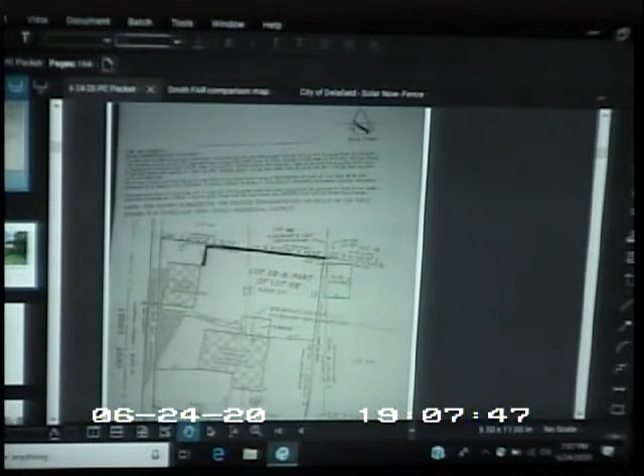When I saw your proposal, I liked the idea of keeping that buffer, and I think I'd like to keep that fence there as well. That way it won't allow my neighbor to use that 3 feet as easily, and I'd like to keep that space for that buffer.

But one thing I did want to ask is regarding the survey. I called 5 surveyors, and surveys right now are 6 to 8 weeks out. I only got one number back so far, but it was $1,000 because they want to resurvey the whole property, and the fence itself is only going to cost $2,600, so that seemed disproportionate.

I talked to my fencing contractor, and he said a lot of communities consider unfinished cedar fences to be maintenance-free, and he kind of sold it to me as a maintenance-free fence. So I was hoping that maybe there'd be some flexibility, since I'd be putting the finished side towards the neighbor, keeping that existing wire fence and a buffer space, and the fact that cedar's pretty maintenance-free, that I could waive the need to get a survey.

Just measure out that existing fence. Do you know if your property corner pipes are visible? I don't know, no.

Literally all the surveyors were just trying to get rid of me. I got one guy, Paul Hilmer, who sounded somewhat interested, so I might be able to get him to do it. But I talked to Land Tech, Lake Country Engineering, Mark Numana was out of business, and Atlas, and none of them really wanted to even touch it.

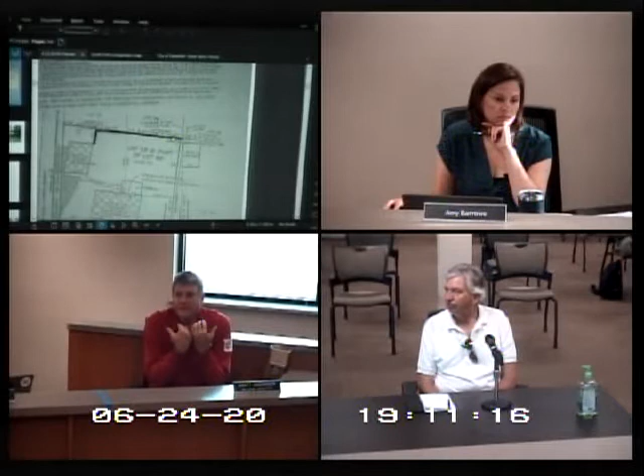Scott, will he require a survey when he does the addition? No, because the addition is 25 or 30 feet from the property line. So then it becomes less important. If you're comfortable measuring it 3 feet from the fence, since the existing fence is surveyed on the lot line, and you agree to locate your new fence about 3 feet in, the risk goes way down. The real key is we want to make sure it's on your property first and foremost, and then located such that you can maintain that fence.

And Scott, can you help me? I have a neighbor with a fence along my property line. For many years, they've painted their side but not painted my side. I don't think it's intentional, they just don't see it and don't think about it.

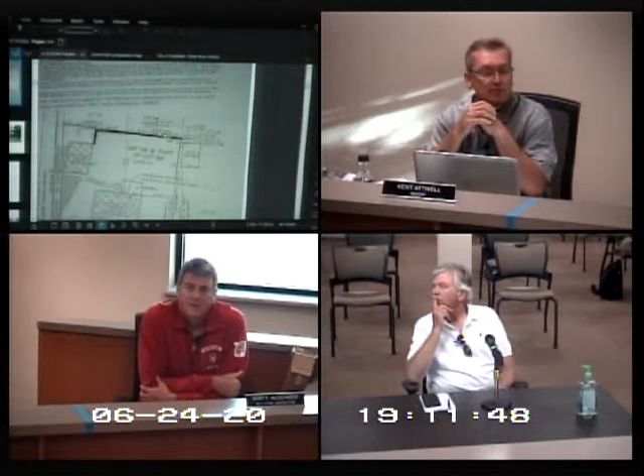If the fence isn't maintained, how does one go about getting it maintained? Well, the portion of our code that relates to fencing requires fences to be maintained, but I think it's intended to ensure fences don't become dilapidated. So for it to be in violation of our code, it would have to be in pretty tough shape, like falling down or boards leaning and falling off.

Peeling paint would qualify, but if it was painted and the paint just disappeared, or there's discoloration on a stained or naturally unfinished wood fence, that's more of a gray area. But there is something in the code that requires maintenance, and the condition of this approval is that it be maintained in good condition.

With that wire fence being surveyed on this drawing, I wouldn't have a problem with locating the new fence 3 feet off of that, but I'd request you actually look for your corner pipes first. You could just stretch a string line, or have the fence guy find those pipes and move them in 3 feet. Pipes can be moved though, right? They pound them in pretty deep, I've got them on all 4 corners of my lot. In a sinister way, people can move multiple pipes.

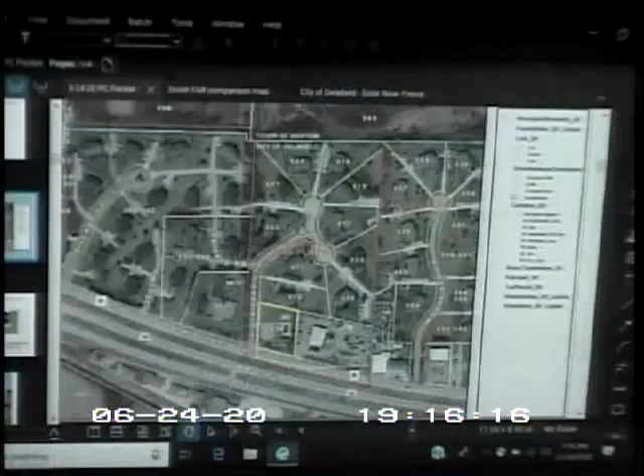Okay, so the subject property is in yellow on the screen. It's Zone B4, but it's part of this much larger residential development that surrounds it, which is zoned R6 residential. The property is part of a planned development conditional use that was granted in 1971, and there have been several amendments since then for various improvements.

The applicant is simply proposing to replace an existing sign, which I will show on the screen. This existing sign is kind of V-shaped. There's two sides to it. It's got existing landscaping and a spotlight on each sign face. And the existing sign is about 56.7 square feet. The applicants are proposing to replace that sign in generally the exact same location.

It'll just be shifted a little bit differently because it will not be V-shaped. It'll just be double-sided. And the proposed sign, although the sign itself is the same size, when you add the Lannon stone, which is much larger, it ends up being 94 square feet in size. However, the sign does still comply with all of the zoning requirements. It will be made of high-density foam board and, again, the Lannon stone.

They are proposing the landscaping and lighting to remain the same. The landscaping will include day lilies around the site. I think the picture you see is before that stuff got growing.

So when you look at the code, the maximum size of a sign allowed is 150 square feet, which they comply with. However, the setbacks do need to comply with the B4 zoning district unless modified as part of the planned development conditional use, which can be done. And because it's not an exact replacement, the Plan Commission should take specific action on allowing the reduction in road setback. So the existing sign, and the proposed sign will not be any closer, is 13.9 feet from County Highway R and 25.5 feet from Vista Park Road.

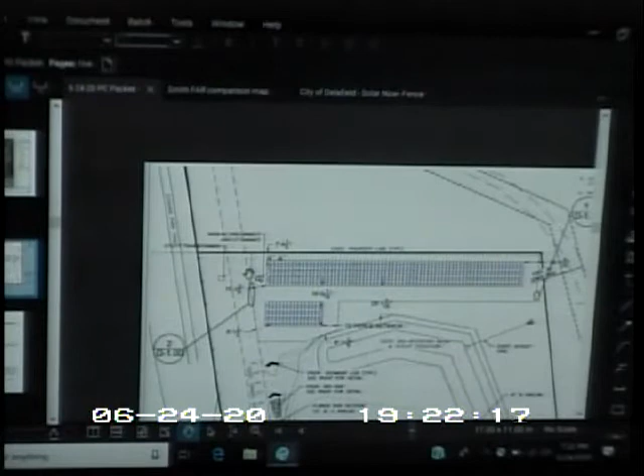I do want to note, this is in the packet, the fence goes all the way to the edge of a gravel driveway on the east side. After talking to the administrator, Tom, they moved that fence over 5 feet. I do have a copy of it. And I think, correct me if I'm wrong, but moving the fence slightly reduces the amount of arrays that you can have on the property, potentially.

But it's otherwise the same site plan, same arrays. And here's the slightly revised location that was submitted today.

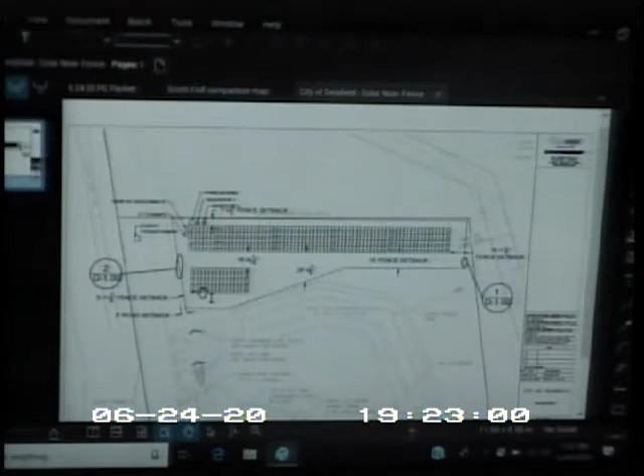We don't want to lose any arrays. Make sure we have that discussion if that seems to be where you're heading - let's have that discussion with the appropriate people before you do that, take any panels off, right? Yeah, so they just moved it 5 feet off that drive.

So we need to schedule a public hearing, and he's got to go back through the process. Okay, make a motion for the public hearing.

I'll make a motion to schedule a public hearing for July 29th, 2020. Can I just do that? I'll second. We have competing motions, as long as the motion gets made. I guess they're going to let Laura go, making... I'll second. Thank you. Okay Laura, can you just restate the motion so it's clear? I'd like to make a motion to schedule a public hearing for July 29th, 2020 at the next Plan Commission meeting, including discussion and potential action.

And the applicant's not... okay, so we have a second? Second. And we understand that they'll be providing an updated map? Yes, they did today, yesterday or today. Is there any discussion? All in favor say aye. Aye. Opposed? Abstentions? Passes. Okay.

Let's do it again. 6D, DLC 079399.001, east of 2018 North Cushing Park Road, Delafield, owner Delafield Heartland WPCC, applicant Tyson Startman, Sunvest.

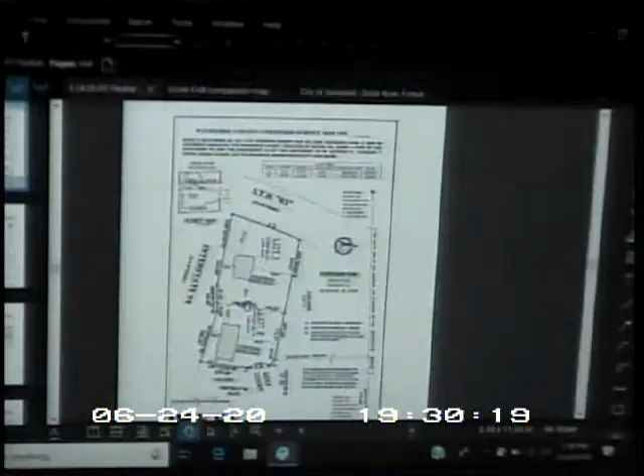Although both lots do have frontage on public roads, I-94 and Highway 83, they cannot access those roads. So the fact that Lot 1 is being created without access does require Plan Commission approval in itself, in addition to the CSM.

But both lots do comply with all ordinance requirements, including the previously approved plan development. The parking for each use complies with the ordinance requirements per lot, so they meet all of those provisions.

There are several easement things we are working through that they need approval for before they go to Common Council. They just received stormwater management agreement approval, I believe yesterday, so they're good there. We just need to make sure the easement language is appropriate and not consolidated with these other agreements, so we need separate access and stormwater easements in place.

We also just want documentation to make sure each lot individually will have access through Gulf Court, so that nothing changes based on the division of land.

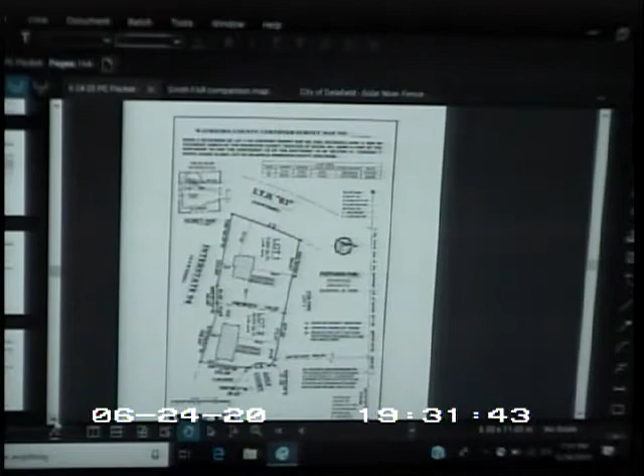The fourth comment related to easements has been addressed with sheet 3 of the CSM. The surveyor and engineer comments are enclosed in the packet, and they've met the engineer comments; the surveyor comments shouldn't be too difficult to get through. So we recommend approval to advance to the Common Council upon compliance with the surveyor and engineer comments. All necessary easements and associated language shall be reviewed, approved, and recorded in conjunction with the CSM, including the stormwater access to lots 1 through 2 and access to lots 1 and 2 through Gulf Court, and any other easements required.

Any comments? Your turn. Thank you.

Mr. Mayor, members of the Plan Commission, I'm Attorney Brian Randall, Davis & Kuelthau, 111 East Kilbourn Avenue in Milwaukee, 53202. I think I'm also the applicant tonight under the new online application requirements. We took the lead in submitting everything, and I think part of learning that new system is why it turned out we had one missing page on the CSM materials, and there is actually one extra page. So what I passed out in paper form tonight, staff also has electronically. Mr. Hafner suggested I just walk you through the differences real quick, and I'm prepared to do that. I believe the document is pages 84 through 87 of your online packet — actually, take that back, 83 through 87.

In the lower right-hand corner, for those who don't look at a lot of CSMs, that's where the sheet numbers are, so I'll be referencing those. Sheet 1 of 7 — we now have 7 total sheets. In the packet it showed only 6, and even then we were missing 1 page, but we have 7 total sheets. Page 1 really did not change, it's the cover sheet.

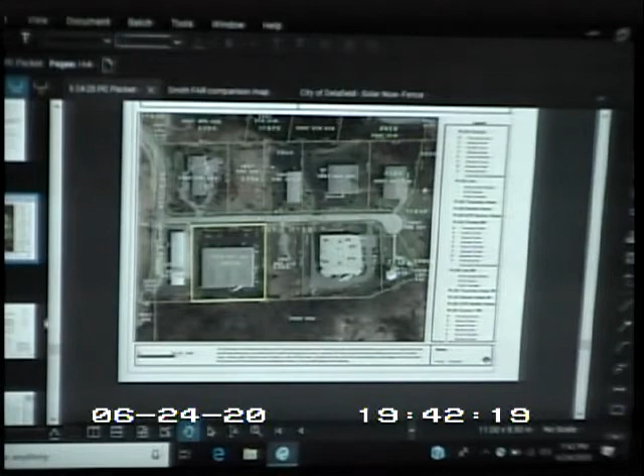They are proposing a 10,000 square foot addition on the east side of the property. Let's see if we can find a site plan. So the building would be a total of 58,330 square feet.

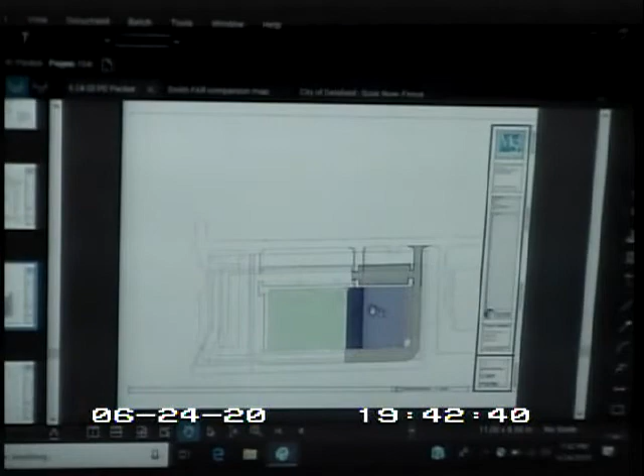They're also proposing a larger addition. Here we go, this is better. So that dark blue, purple is the 10,000 square foot addition. The lighter color to the east of that is proposed for future use, as well as that darker gray parking area. That is not part of this proposal. They're just showing it as a build out to identify how it'll all fit on the property down the road.

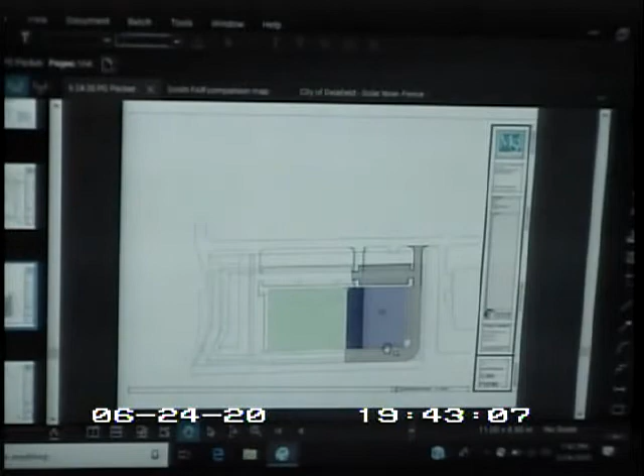The proposed site plan addition does require about 4 feet of cut to accommodate that grade. However, they don't need any retaining walls, and they are dealing with drainage. There's an existing dumpster on the east side of the property that will need to be moved, shown here as this little square. It'll need to be moved to the other side of the addition.

So the proposal, I have a table that shows all of the dimensional standards. The proposal does comply with all dimensional standards of the code.

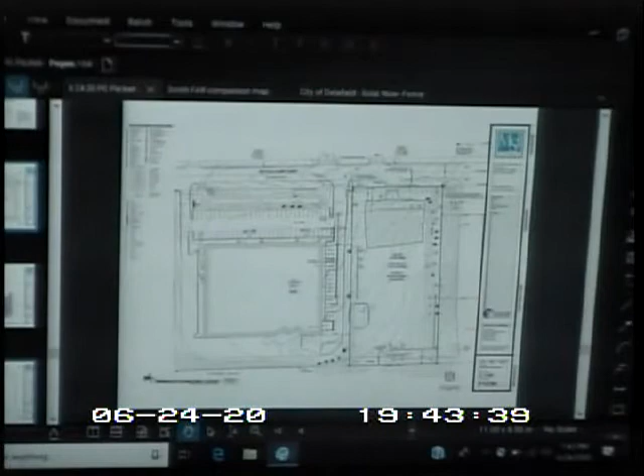The parking lot, let's see if we can find it. Here is a site plan that shows the existing parking lot on the east property. When we look at the number of required parking spaces, they're required to accommodate 123 spaces. They currently have 91, but they're losing 18. So they would like to use the parking lot that exists as part of their approval.

However, they don't show 24-foot aisle widths, so they're going to have to reduce the number of parking spaces. That's something that they'll be prepared to bring to you next month.

One thing that they could use some feedback on at tonight's meeting is whether or not you'd be willing to allow banking of some of the parking spaces, because they don't feel it's necessary for the current or proposed use. That would mean they wouldn't have to enlarge the asphalt area until they came in for the addition. And when they come in for the future addition, they're proposing quite a few extra spaces, so they'll have plenty at that point.

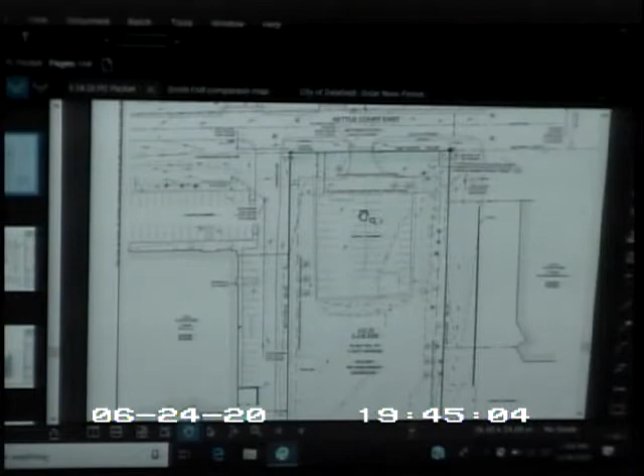Additionally, I don't think I have it in here, but as part of a parking lot, you're also required to accommodate landscaping and landscape islands adjacent to the parking lot around it. That is something that they will be coming to next month's meeting with more information on.

Architecturally, which is really what is probably most important for tonight, they are proposing—currently the entire building is made of masonry. On the addition, they will continue that same look, except for on the east side.

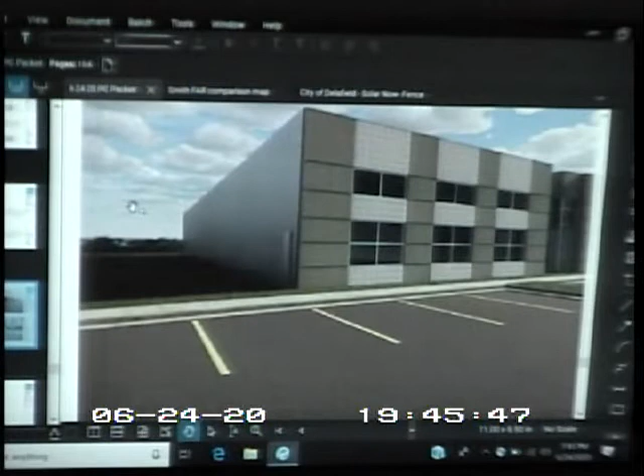See if I can zoom into this. They're proposing that whole wall to be metal, matching the same color scheme of the building. But because they are proposing that future addition, they don't want to put a costly finish on that side of the structure, so they have no windows. There's a little exit door in the corner, but otherwise it is a large metal sheet. They are looking for some input on whether or not that's acceptable.

They're not proposing any changes to signage.

The landscaping—the addition's going to require the removal of 2 trees, one dead and one live maple tree. I suggest they mitigate for the loss of those 2 trees since they were part of a previously approved landscape plan, and that the applicant should consider some additional landscaping on the north side of the addition. In the previous section, we talk about adding some landscaping on the north side of the parking lot as well to screen that from the road.

Lighting, they're proposing—it's real insignificant—2 new wall pack lights on the east side of the addition and 1 wall pack light on the south side of the addition.

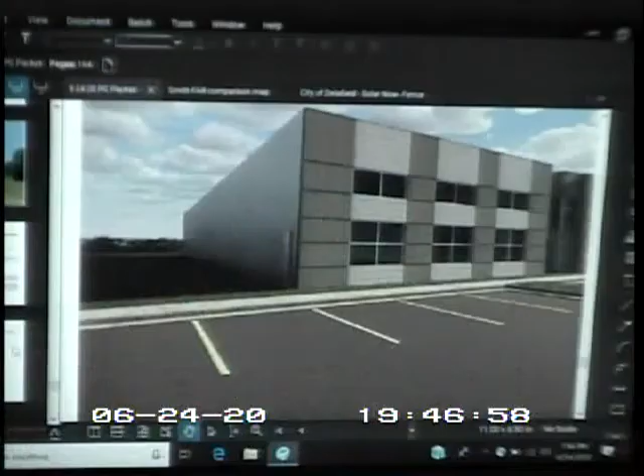That existing parking lot that you have not approved yet has pole lights. They're solar operated, standing on wood posts. So they should receive some feedback on whether or not that's acceptable, or if they need to come in with a new lighting plan to light the parking lot, or can they remove the lighting altogether on that extra parking lot.

Stormwater management, they are working on that right now. Because of the additional parking lot and the addition combined, they do need to provide updated stormwater management facilities, and they're in the process of getting those planned out. There's currently a basin in between the building and the road, and I can't remember, John, are you doing something similar in front of the parking lot?

A proposal for a secondary storm swale that will feed into that existing basin we're looking at right now. So we did recommend that they provide stormwater management facilities that accommodate the future addition. However, it's not conducive for the way the site works right now, so I think the access is in the way of providing a larger basin. So they would prefer to just provide stormwater management for the improvements proposed as part of this proposal.

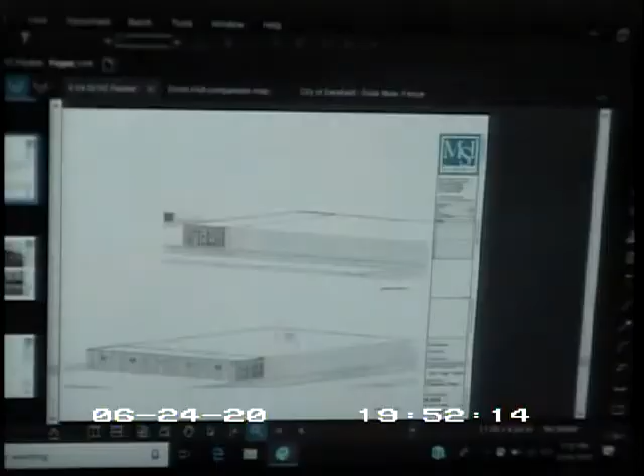They're going to fill it with racking, so the practicality of it is pretty minimal, but we might end up putting some windows up high just to allow a little bit of natural light into that space. I believe the previous page has a rendering of that side with windows. Yeah, I think our 2D elevation might show the windows as an option.

We had played around with a few different options, so apologize for the inconsistency in the submittal. As you can see on that elevation there, we are showing a couple windows up high potentially. But the thought is when they have the ability to do the final expansion, then that wall would come out and that would all be open for manufacturing space.

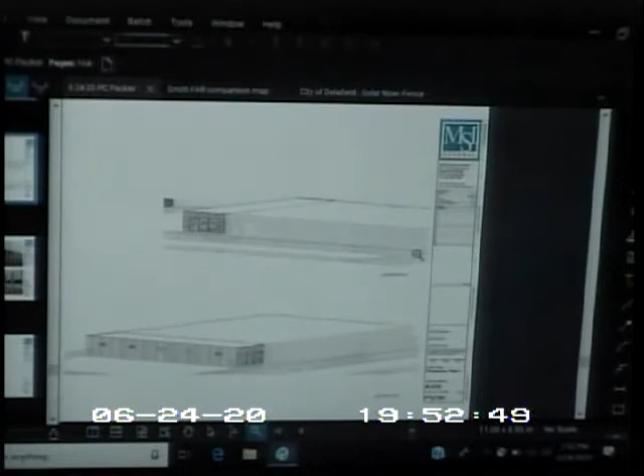So they're in a few different municipalities right now. They're trying to consolidate operations here in Delafield. So that's pretty much down the road. It would be down the road a little bit. Yep, but we're trying to think appropriately.

For me, it makes sense to leave it all metal or even just some windows, minimal amount, because if you're going to expand off of it, it doesn't make sense to put all the additional work into it to have it finished off in any way like that. So I wouldn't have a problem with leaving it that way.

Who is using the parking lot right now? It's a mixture of Stuffed Puffs employees and some of Tanis employees. Will that continue? I believe Tanis will probably take control of that parking lot going forward, so, yeah. All right, thank you.

Their operations staff is at a maximum of about 70 to 80 employees per shift, and so their parking needs are a little bit less than what the code requires, but we are trying to follow what the code has asked for, so that's where Amy's comments on the parking land banking, some of that parking came in.

One other question on the recommendations that Amy had brought out, I believe there were 1 through 4. Do you have any questions concerning those 4 recommendations? I think for us, the one recommendation that the light poles that the neighbor put up on that parking lot, it's certainly something that we would typically not put up, so I think we're open to that.

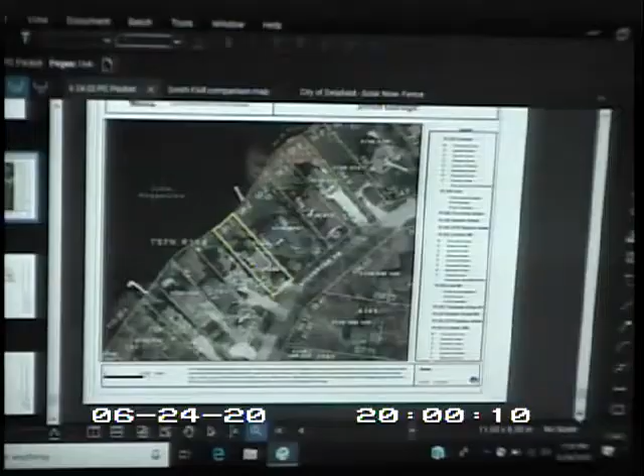Hey, John. Okay, we will move to 6H, DELC 0749.069, 3207 Sylvester Drive, Delafield. Owner applicant Edward W.D. Smith II. Applicant seeks a special exception from the non-conforming lot standards in order to raze a detached garage and construct an attached garage.

So I am going to pass around a packet of information. The applicants did a little extra homework after receiving the staff recommendation, after the packet went out. So I've asked them to present this extra information once I quickly go through the report, if you don't mind.

So the applicants are proposing a special exception from the non-conforming lot provisions of the code. Their property is zoned RL2 Residential Lake District, which requires a 10,000 square foot lot and 50 foot wide lot as well. The subject property is just under that with 9,072 square feet. It's located on the east shore of Lake Nagawicka. The property is served by sewer and water.

They currently have a single-family home and detached garage. I'm going to go to a site plan here. So you can see the detached garage is close to the road. There is a lot line swale in the northeast lot line that captures drainage from the property and directs it to the lake. The applicant is proposing to raze that 411 square foot detached garage and replace it with a 675 square foot attached garage.

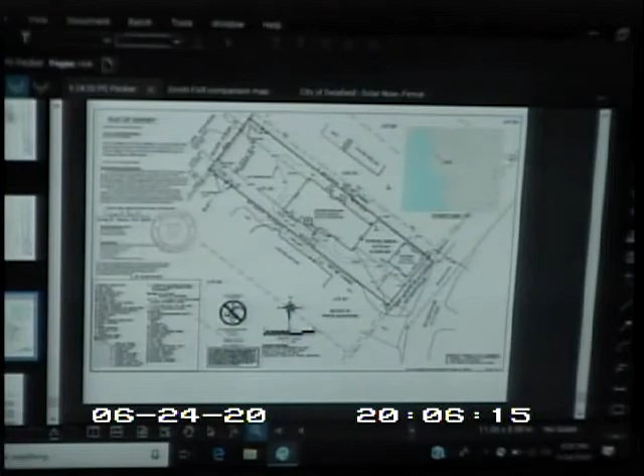The provision is intended to maximize the overall bulk proportional to the lot size. The applicant can still relocate the detached garage and increase the square footage by approximately 71.3 square feet.

I'm sure the applicants have a lot to say here, so unless there's any questions, we can hand it off to them. Yep, so if you could give us your name and address to get started?

Yes, my name is Ed Smith. This is my wife, Sue. We live at 3207 Sylvester Drive in Delafield. Okay, the floor is yours.

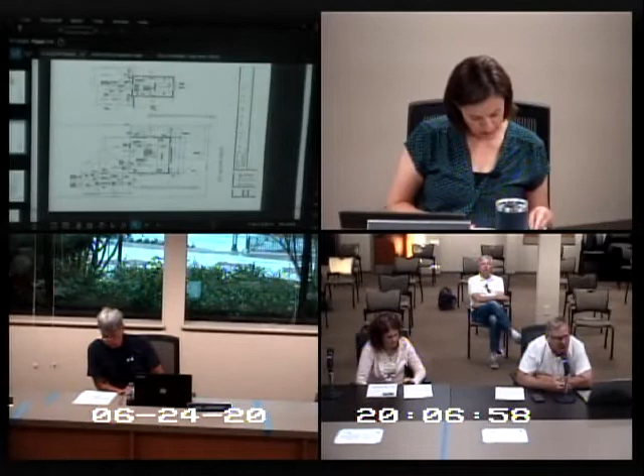Okay, thank you. So, first of all, thank you for giving me the opportunity to speak to this. What you have in front of you, let's start with that first page, goes through some analysis with the help of Sue. My wife is a real estate agent, so we have access to MLS and tax records. We were able to get pretty good estimates of square footages of homes, regardless of what the tax records might say. When they sold it last, we had an MLS listing.

So when we went through and looked, you'll see the first line on that table says 3207 Sylvester, proposed only with the garage, so I can compare it with the garage. I'm going to talk specifically about the floor area ratio of the home and the homes we're comparing it to. As Amy pointed out, we are at 42.1% if we just talk about the garage and forget the flex bonus. That puts us at 42% with 3821 total square footage, the house being 3165.

The detail is behind you in the pages. I'm not going to walk through those, but behind for each home is the MLS listing and then the tax records from Waukesha.

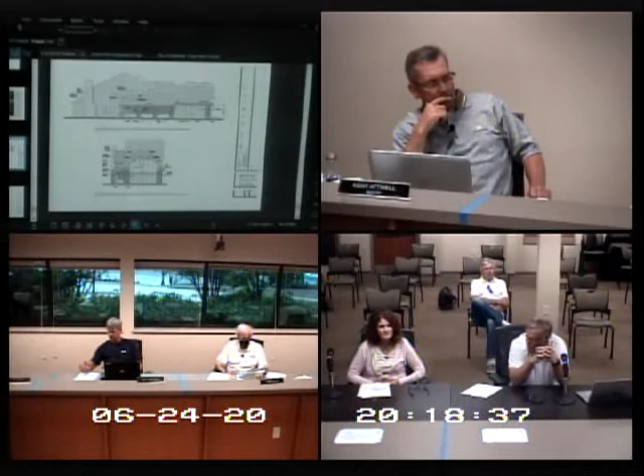I like your homework showing there are other situations like this in your neighborhood, but usually there's a story with each one of those too, and we don't have that story. I don't know if you do, Scott, on any of these? Say that again? The exceptions, or the violations of the surrounding homes that they have here, why were those granted?

They were granted, I think, by variance back when variances were more easily obtained. And the variances were issued by who? By the Zoning Board of Appeals. And what's their standard? I don't know, and it sometimes changes. All I know is—no, what's the standard for the Board of Zoning Appeals to approve a variance? A hardship.

Is that required under this proposal? I think they're entitled to pursue a variance, but because it's a substandard lot, it's tough. We thought 3 or 4 years ago that this body was better able to understand the application than the zoning board of appeals, so we clarified this path 3 or 4 years ago.

So in doing that, would the same criteria, including hardship, apply here, or is that exempt here? No, because the hardship was created by the city. The lot existed before the RL2 zoning district. So here's a lot that's not 10,000 feet, and at some point, I don't know if it was the 70s or the 60s, the city came along and overlaid RL2 zoning onto this lot, automatically creating a hardship. So it's non-conforming from that date? Right. When they overlaid the zoning on that?